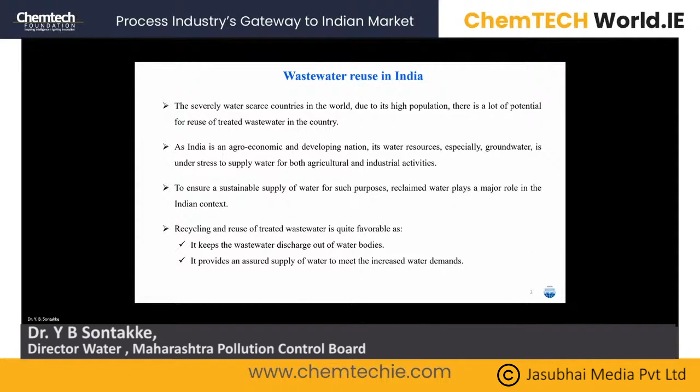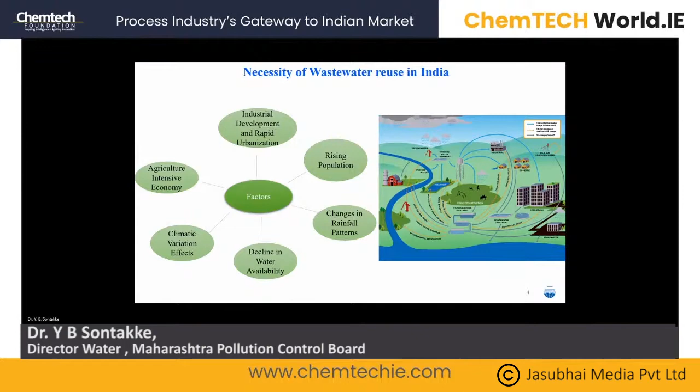So these are some specific points, everybody, because since yesterday we have been listening to so many theoretical issues, so many practical issues, and actual case studies. So these are some specific sources, where the water can be obtained and reused, or what may be happening with the water cycle, and where it is going.

The various categories we can say are in agriculture, the water is used - if suppose we have reclaimed water, it can go, as I have told you, to the garden nearby my house, used for food crops. Whatever vegetables I want, that was obtained from my nearby garden. So like that, food crops, then non-food crops also, then grass and fodder, because we require milk and meat also, so for that fodder is also required.

In case of industries, we are focusing more on industries, because though they consume not more than 7% of the total water, they are still the major entities which can do much in this field.

That's why. The third one is in urban areas, we can also use that water for the golf course. Even we can use this water for public parks, toilet flushing - that is already started - then horticulture, fire demand, and landscaping. In case of environmental concerns, we can use this same kind of water for the development of wetlands and impoundments, and recreational use.

Then indirect uses - all houses are made compulsory to provide a groundwater recharge system; without that they could not get permission. And we can even allow some water to flow into the river to maintain the ecological balance, or we can say the ecological flow can be maintained. So these are the different categories where we can use reclaimed water.

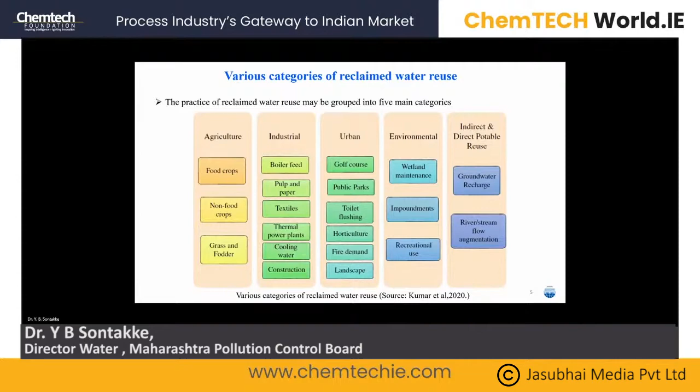This is just a theoretical theme of the entire issue, and what are the different technologies - because we have already gone through a number of technologies in different areas since yesterday.

I am not going into much depth to explain the different technologies available. But in general, the primary treatment, secondary treatment, tertiary treatment, and the utilization of treated water are the four components involved in the entire process. Water is used for some purpose, then wastewater is generated, treated properly, reused properly, and the sludge is removed. This is the simple way by which we can go ahead with different technologies.

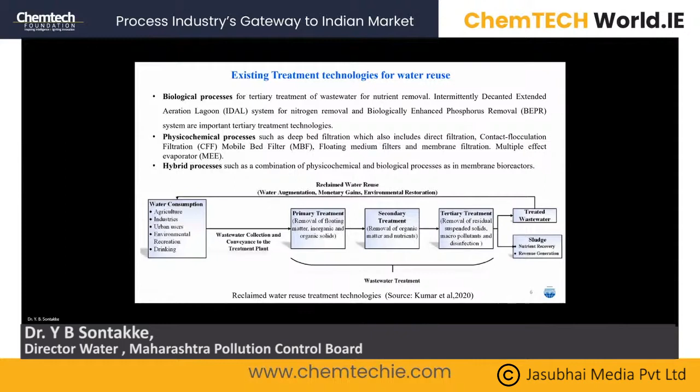So what is the scenario in Maharashtra? When I talk about the entire world, that may not be appropriate, because I am dealing with one portion of India, the Maharashtra state.

What is the total number of urban local bodies? 391 to 394 are the total urban local bodies. It includes corporations, councils, cantonment boards, and Jilla Parishad. All these are included, and they are generating roughly around 10,000 MLD of sewage every day. And what is the capacity available for this?

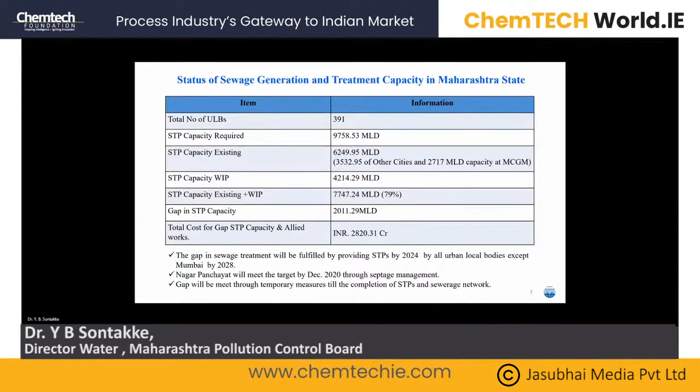This is the main thrust area where technocrats, technology providers, and technology people who have the most economical technology available can approach these areas where they can do much of the work, and really bring up treated water which can be made reusable or available for various purposes. So this is the thrust area, that's why I've shown this slide.

And the majority of the municipal corporations don't even have treatment facility for a liter. So these are the thrust areas. I wanted to give the message through this conference that the majority of technology providers should concentrate on this field, where definitely they can invest themselves in any model. Either they can come through PPP or approach the corporations, but we want the most economical solution. This is the pre-requirement, this is the only issue.

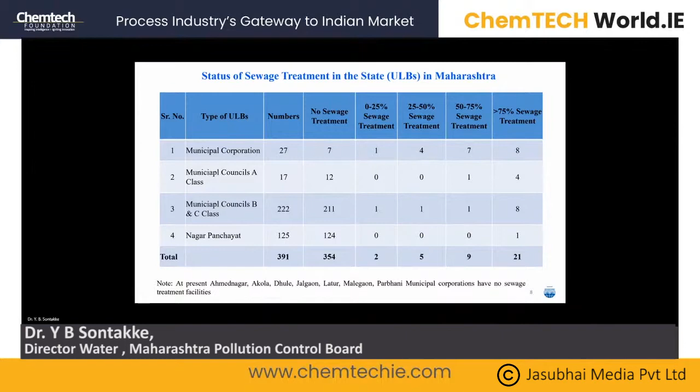Second part - we have different rivers, because everybody might have read that there are 53 rivers polluted in Maharashtra. So why are these rivers polluted? Just because of the disposal of sewage, either untreated or partially treated, into the river bank, and that has resulted in pollution.

Because the water that was available in our childhood could be picked up in the forehand and drunk, but now we don't dare to even put our hand or leg in the flowing water. So this is the scenario now, and it needs to be changed.

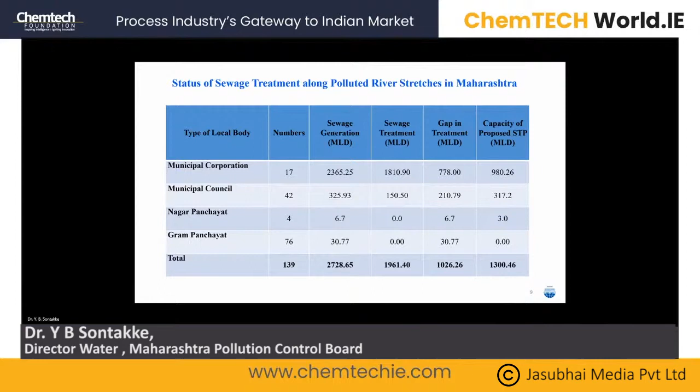Now we have tried to minimize 85% of the pollution, and there are so many ways by which we have tried to do it. I will just go through some of the case studies.

This is one of the case studies, because unless you understand where and what exactly Maharashtra has done, I wanted to brief some of the ideas. So this is one of the great ideas - the Koradi thermal power station.

Yesterday this case study was presented with all the details given, but in gist, Nagpur Municipal Corporation is generating some sewage, and out of that sewage, it is treated and reused - roughly around 130 MLD - and it is further being taken up to the extent of, I think, 250. But the first phase is already completed, and it's 130 MLD of water which is recycled, meaning raw water use was minimized, meaning water resources were conserved.

So this is the way by which we can go ahead.

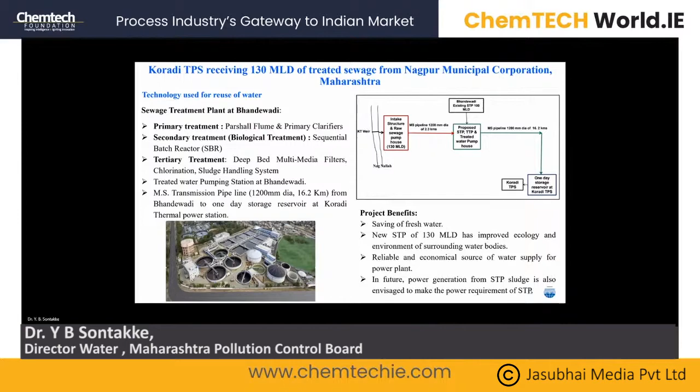Another example is with us: the RCF, Rashtriya Chemicals and Fertilizers, Trombay, Mumbai. This is another example where we are recycling roughly around 18 MLD of sewage, which has reduced the burden on raw water and helped minimize its consumption.

Recycled water can be recycled and recycled a number of times, and water never deteriorates in its chemical properties. It will remain as it is. You can even recirculate it n number of times.

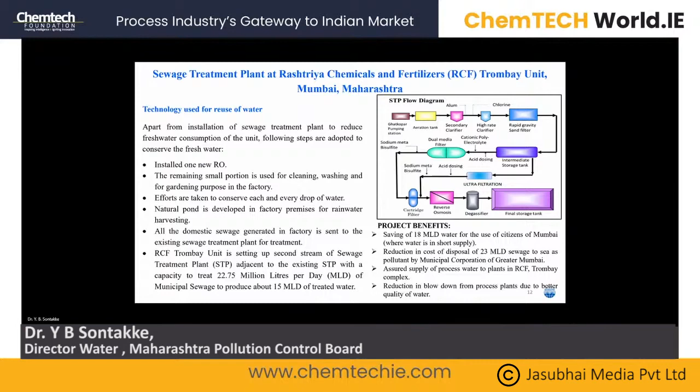Another area where we can recycle water: we have one best example of the common effluent treatment plant in Nandgaonpeth, where we are recycling 4.5 MLD of industrial effluent coming from a cluster of textile units. This is being reused, and the total discharge from the CETP is made zero.

They are recycling the treated water back to the member industries. This is the common cluster from which we are recycling, and that has really helped minimize the stress on natural resources.

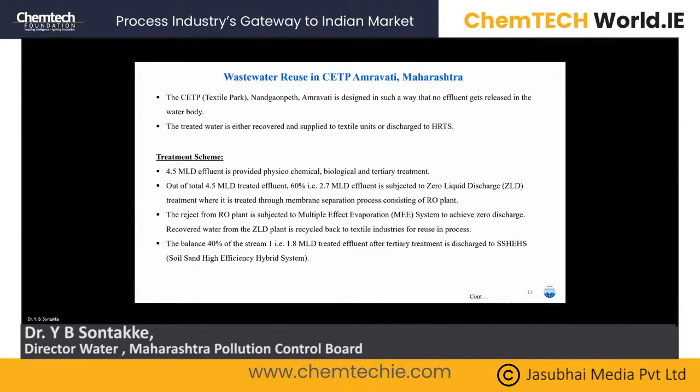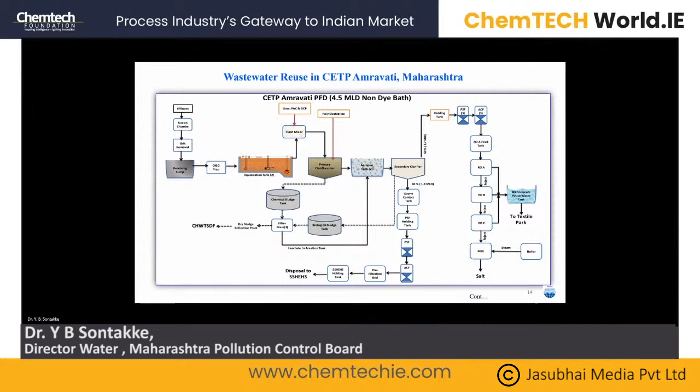These are some specific flow diagrams which can give us a detailed idea of the treatment. I'm not going much into the flow diagrams of the treatments, because everybody is well aware of what kind of treatments are given, and some of the other speakers are also speaking on that issue.

So these are some specific areas, and we have already taken proactive steps to treat the effluent. The Government of Maharashtra has already decided to go with 100 villages for reusing, and they have already started that work for treatment, with execution in progress.

We have also taken up an in-situ treatment program in the Vashisthi river of the Konkan, where we are treating one nala through that technology.

There are also alternative diversions of nalas. Earlier, in case of the Panchaganga river, 21 MLD of sewage was going into the river; that has been diverted to the available STP.

In case of Chandrapur also, they have built one CETP, one STP, but it was not used because of the non-availability of infrastructure for carrying the sewage. So these are some specific alternatives we have provided, and we have guided them that they can do treatment through this type of waste system.

A new STP is also commissioned, and already we are recycling near about 395 MLD of sewage. So that much load has been reduced from the fresh water.

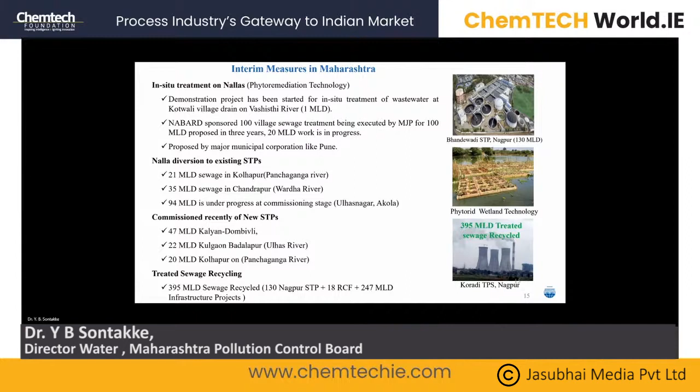Even in case of infrastructure projects where construction is required over 20,000 square feet, it has been made compulsory that 60% of the sewage from that project shall be recycled. In that way, roughly around 247 MLD of sewage is recycled.

Even in case of textile units, standalone units other than the CETP, we are making it compulsory that 50% of the effluent be recycled. In textiles there are two components: the dyebath colored effluent, and the lean effluent. Lean effluent can be used for recycling and reused again and again, multiple times. So that way we are conserving water and directing industries to go for this type of specific treatment facility.

In case of sugar units, Maharashtra is a pioneer in the sugar industry, and after UP, we have the maximum number of sugar factories. So 100% of the treated effluent from sugar industries is being used for agricultural purposes.

There are some issues with some sugar factories overloading or overflowing some effluent. But since 2014 to 2018, we have established a water distribution system for the treated effluent, and because of that, uniform distribution is happening in case of the sugar industries.

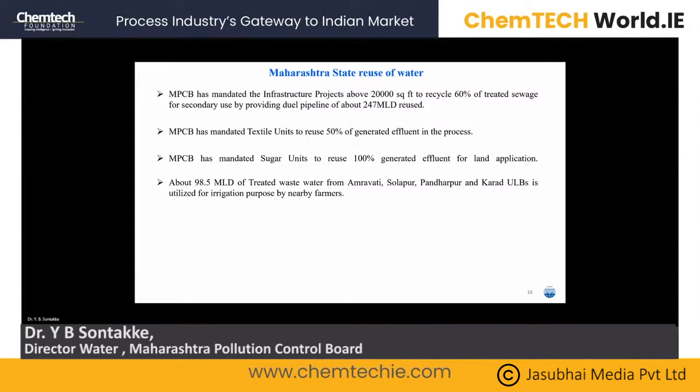One of the initiatives is that we are not allowing any industry to discharge treated or partially treated effluent to the river. We had permitted about 16 industries, but now that number has come down to 3, which were permitted way back in the 1970s when industrial development required it. Slowly we have minimized the number of industries discharging to water resources like lakes or rivers, that has been prohibited. Now only 3 industries are allowed, with stringent standards.

The board has already issued directions to the councils and corporations for providing adequate treatment facilities, and roughly 60% of the sewage is being treated.

As per our statistics, by 2024, and in the case of Mumbai, for upgradation by 2026, the entire state will be free from this pollution. This is the plan we have made, and it has already been submitted to the Honorable NGT as well as to the government for implementation. We are taking a review of it monthly, or twice a month.

The third part is that we have already conducted several workshops, hundreds of them, with public gatherings, with industrialists, with people, so that they go for judicious use of sewage. That will definitely help them upgrade natural resources, and even recharge groundwater. And even gram panchayats, because a gram panchayat is a small entity of the local body, they don't have the technical capacity and manpower, meaning they don't have skilled manpower.